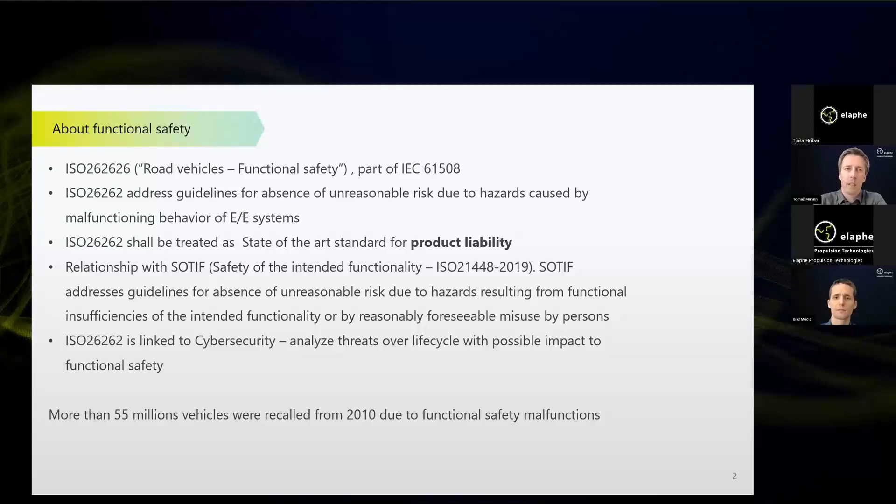An interesting fact is that more than 55 million vehicles were recalled in the last decade due to functional safety anomalies. And this is caused due to some issues in either the hardware, software, and or maybe on the system side of the products.

So the safety plan is one of the first and very important documents under functional safety. The safety plan specifies how we will address functional safety, and especially addresses the technical activities, organizational and process activities. Under the safety plan is specified the safety management during the lifetime for the complete team, meaning for the functional safety engineer, for the technical team, and even for the management. So we need to properly manage the competence of this key technical team. Of course, as for other projects, clear definition of roles and responsibilities is specified inside the safety plan.

And one thing which is very often termed in functional safety is the safety culture. Safety culture needs to be specified in the safety plan and needs to be disseminated inside of the team and with all the parties involved in the development, or actually in the complete life cycle. I will give you two examples of safety culture. First, the functional safety manager is independent inside of the organization. Second, safety has the highest priority and it cannot be compromised due to cost or schedule.

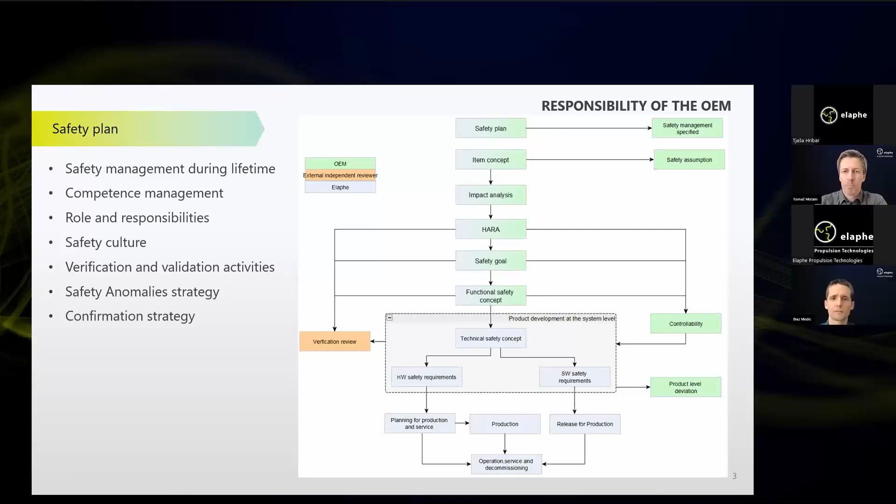Item is a system or combination of systems on which ISO 26262 is applied. So an item has some function on the vehicle level, and then item definition is actually a work product. It's a document which details and specifies what the item actually is.

Subcomponents of the item are elements, and these elements can be, again, a system, it can be the software, it can be the hardware, it can be even just the software model or software unit. So the item should have specified the function on the vehicle level, interfaces to other items or between components. It should specify what is inside the scope and outside the scope, so boundaries, dependencies from other components, known hazards, which are basically based on some previous experience, and safety assumptions.

So especially in the initial phase, maybe we are not sure about some requirements, then maybe we can treat this as an assumption, or write it down as an assumption. But then in a later stage during development, we need to validate these assumptions. So that's why it's very important that our assumptions are resolved during the development phase.

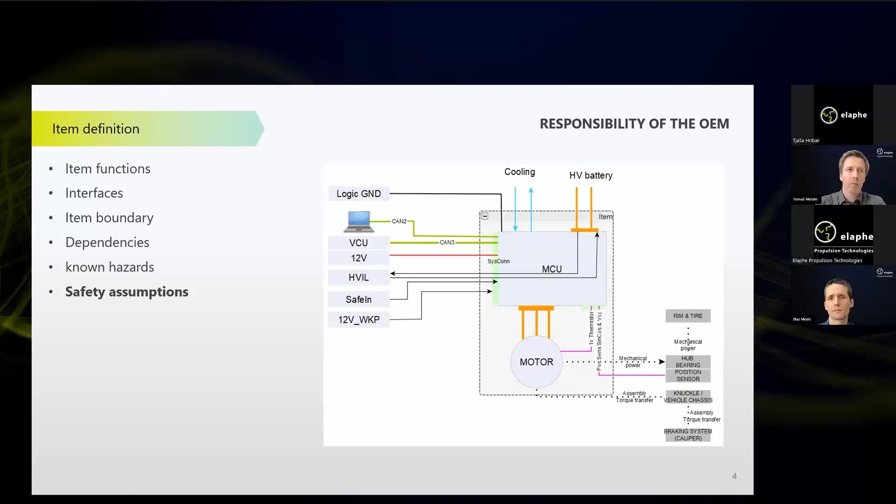HARA is an abbreviation for hazard and risk assessment. Under the HARA, we identify and categorize all the hazards of the item. In the first stage, we have to identify all relevant operational situations. For example, driving on a highway, driving on a country road with opposite traffic, standstill, charging, and so on. Each hazardous event is then classified with 3 parameters.

These are exposure, severity, and controllability. For a well-defined operational situation, it's quite easy to determine the severity and exposure, but this is not true for controllability by the driver. I will say a couple of words about this in the next slide.

If we have all these 3 classification parameters, then it's possible to determine the ASIL rating according to the metrics inside of the standard. And out of this ASIL rating and hazardous event, it's possible to determine the safety goal.

I will give you some examples for the powertrain systems and hazardous events. For the internal combustion engine, we can have unintended acceleration as the risk. For the system with one e-motor per axle, we can have, besides unintended acceleration, also unintended deceleration due to the regeneration braking performance of the motor. Then in case of a distributed drivetrain, which can be in-wheel or dual e-axle, we have either ASIL C or D rating, where D is the possibility to have some lateral movement, or so-called yaw rate.

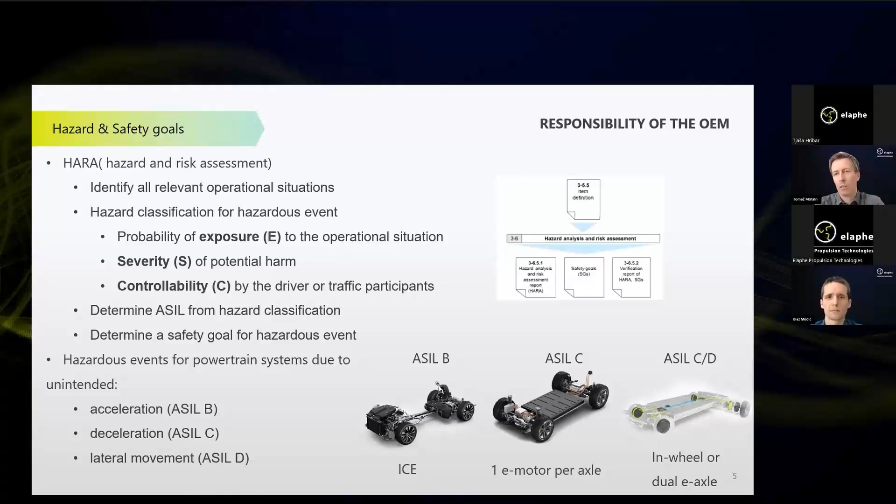So controllability assessment is especially important for the distributed drivetrain, to actually distinguish if we are in the range of the ASIL C or the D level.

In the initial phase, in the concept phase, we can use vehicle simulation to determine and have some first assessment of the controllability. Of course, for this kind of activity, we need as good a vehicle model as possible.

But then, when during development the item is integrated into the vehicle demonstrator, we can perform a similar activity on the actual demonstrator. For example, on the right picture, we inject a faulty torque on the rear left motor, in this case 600 Newton meters, and then we observe what the reaction of the vehicle and driver is.

On the bottom graph, we can see the actual value, which is the blue one, and the simulated one from the vehicle simulation. Out of this, we can get the controllability parameter, which gives us the ASIL rating. On the other side, controllability is very important to determine the fault tolerant time interval for each of the functions where this controllability is applicable.

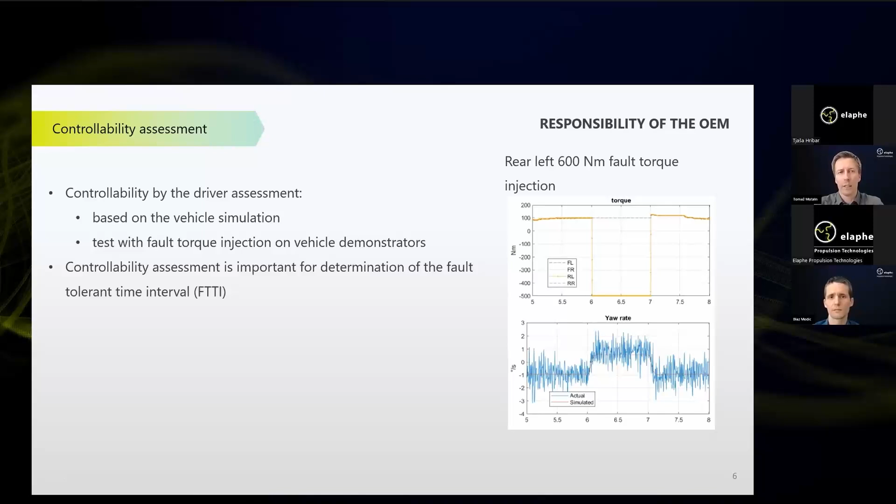Okay, hello also from my side. We are now finishing the concept phase with the functional safety concept, which is still the responsibility of the OEM.

In the functional safety concept, we will describe what we need to do to achieve the safety goals that we have previously defined. So the functional safety concept consists of different safety mechanisms and safety measures, which are described in terms of functional safety requirements and then assigned to different architectural elements of our item.

In practice, this can look, for example, like this: if we have an item which consists of two different CPUs, we can assign some functional safety requirements to CPU 1 and some functional safety requirements to CPU 2. So why is this important?

With a good design of the functional safety concept, we can achieve that we don't need to develop every part of our item according to the highest ASIL rating of our safety goals. This is important because it can save us a lot of development time, cost, and resources further down the road during the product development stage.

Once we have our functional safety concept defined, we still need to treat it as preliminary until we have validated it in the end, during the safety validation process.

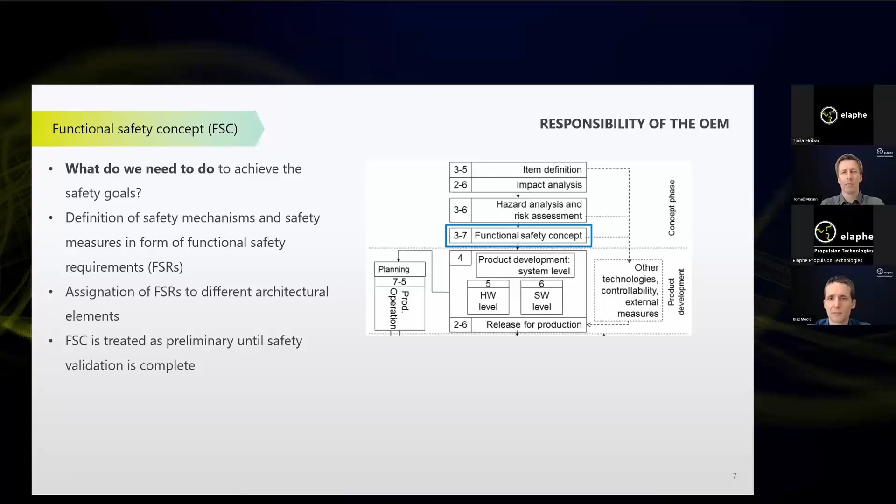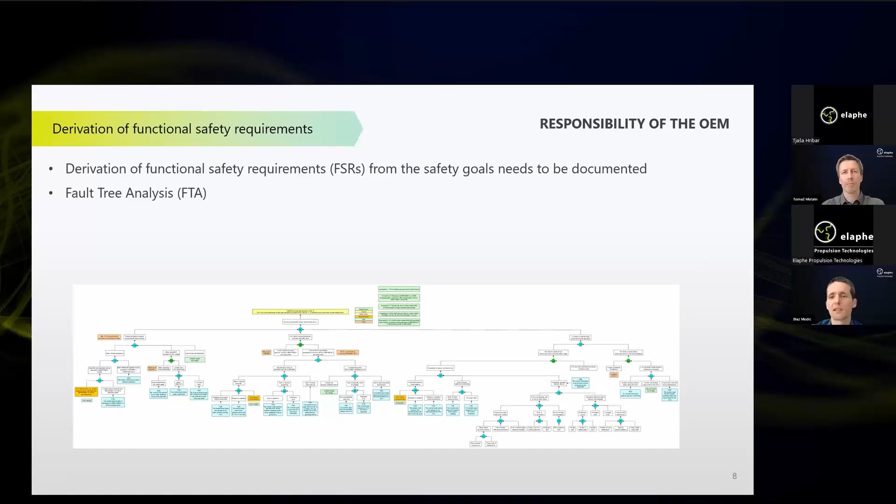So let's take a look at this process in a bit more detail. This will be the fault tree analysis that we will be looking at. Unfortunately, I cannot share the complete analysis, but we will explore just one path from the top, from the safety goal, down towards one of the functional safety requirements.

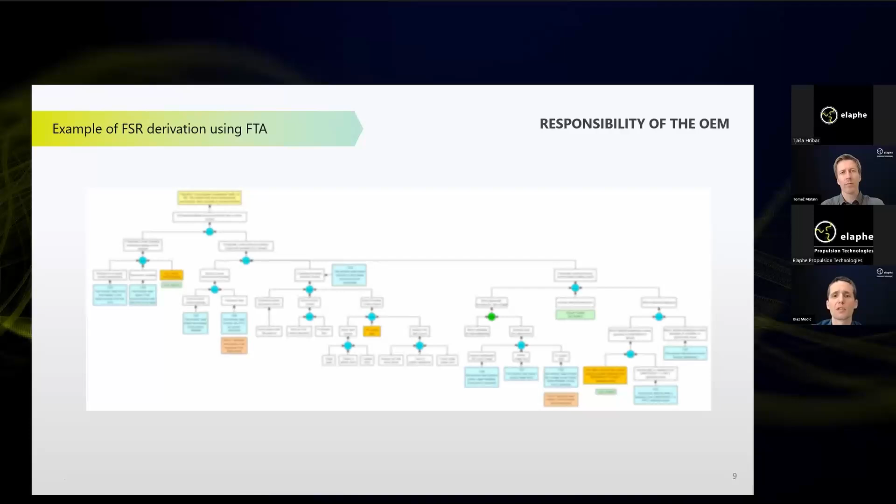So, like mentioned, we start at the top with the safety goal, which in this example states that the vehicle shall avoid unintended deceleration whilst traveling in forward direction. This safety goal is dealing with the hazard of unintended deceleration and has a certain ASIL rating.

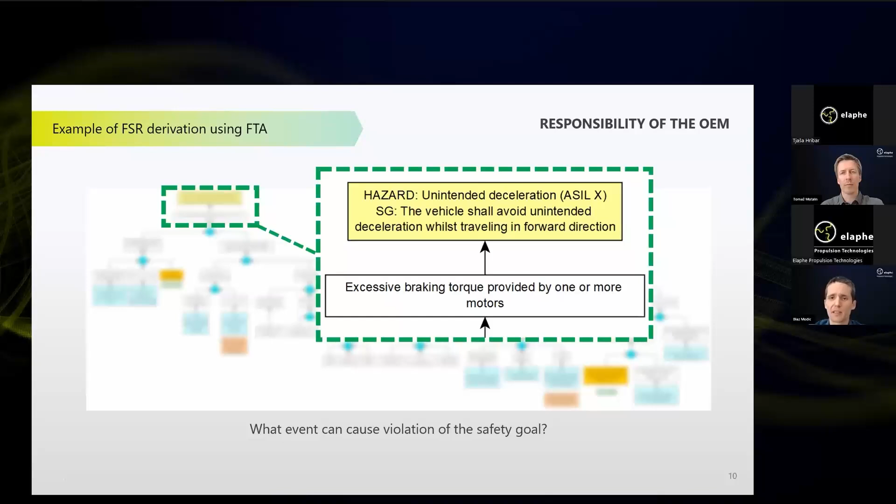So to begin this analysis, we need to ask ourselves what event can cause the violation of this safety goal. In our case, this safety goal can be violated in case excessive braking torque provided by one or more motors happens. So we have our event, but this event is still too general for us to define a safety mechanism that can prevent it, which means we need to derive it further.

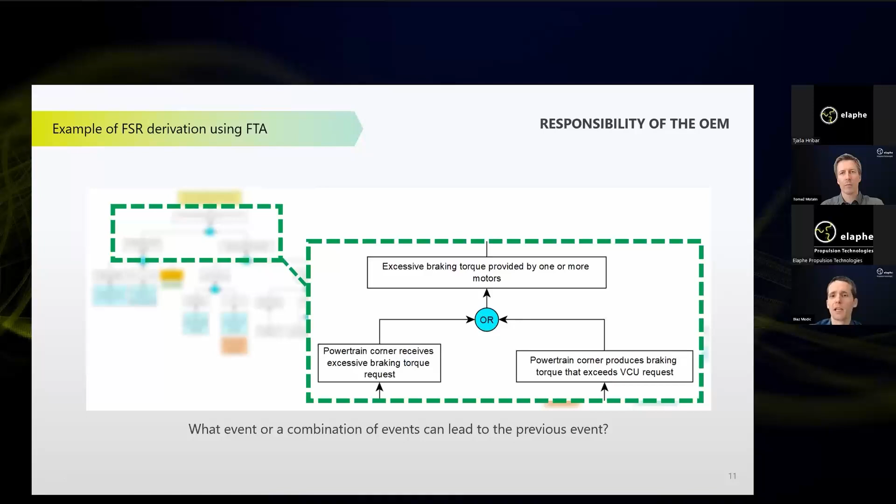We then ask ourselves what event or combination of events can lead to the previous event. Excessive motor braking torque provided by one or more motors can be the result of the powertrain corner producing braking torque that exceeds the request, or that the powertrain receives the excessive braking torque request. And if we derive this further, we follow the left path.

Powertrain corner receiving excessive braking torque request can be the result of either the VCU actually sending the wrong request, the request being outdated, meaning it was requested a while ago but is no longer relevant, or the request getting corrupted during transmission.

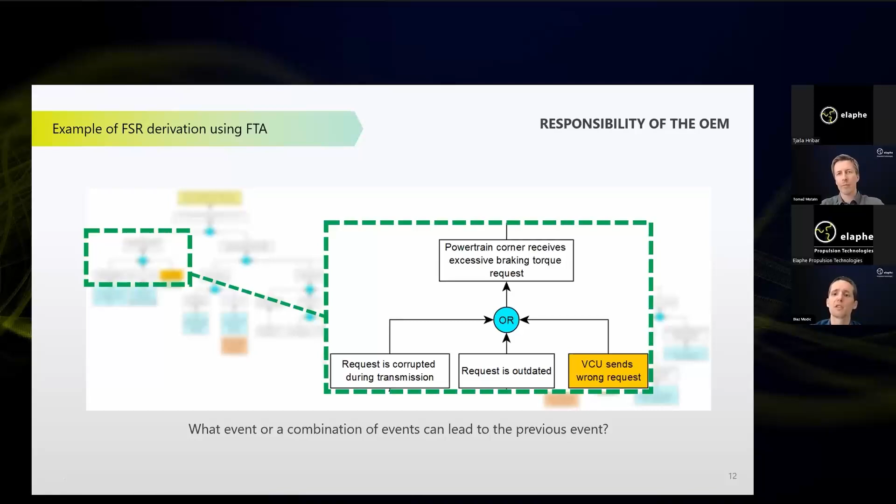So now these events are all simple enough for us to define functional safety mechanisms for them. For example, for the message corruption event, we can define a functional safety requirement which states that the inverter shall check the integrity of the data received from the VCU.

So in this example, we followed one path from the top, from the safety goal down to one of the functional safety requirements. Then, to finish the complete functional safety concept, we need to define these functional safety requirements for each of the events that can cause the violation of this safety goal.

Then we repeat this process for all of the safety goals, and then we get a list of all of the functional safety requirements that we need to implement in our system. In the end, what is left to finish the functional safety concept is just to assign those functional safety requirements to the different architectural elements of the system.

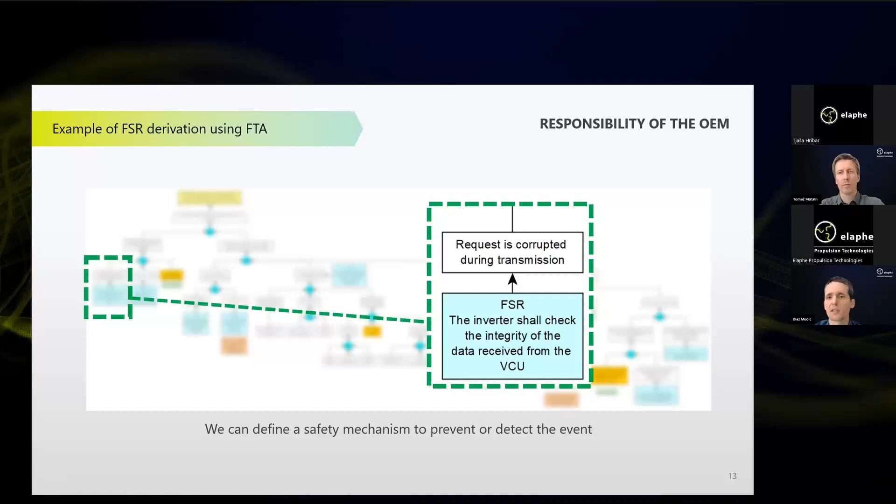So with the concept phase of the design finished, we now begin the product development phase, which is now the responsibility of Elaphe as the supplier of the powertrain. In the technical safety concept, we describe how we will implement the functional safety concept.

Again, the functional safety concept describes what we need to do, and the technical safety concept describes how we will do this. This is described in terms of technical safety requirements, which again need to be derived from the functional safety requirements, using appropriate analysis and documenting the process, so that we are able to show a potential reviewer or assessor how these requirements were defined.

When we get to the list of the technical safety requirements that we need to implement, we then allocate them to software or to hardware, or in some cases to both, depending on how we will implement those requirements.

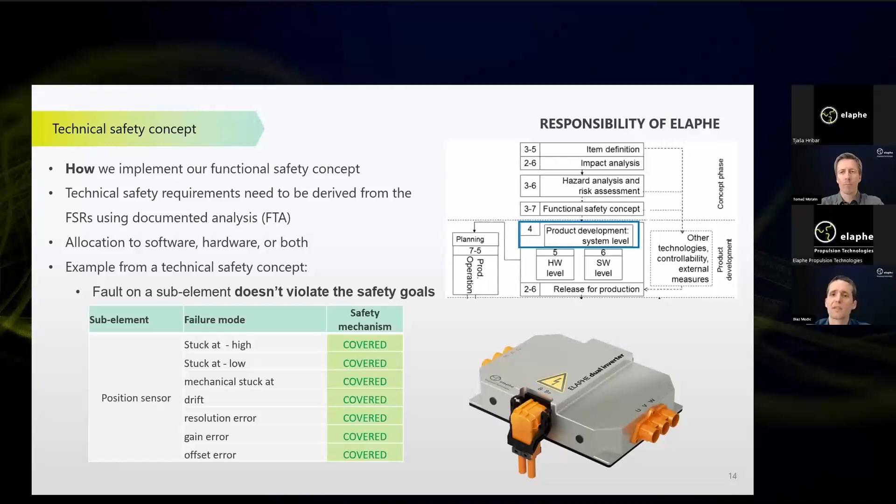So all of the technical safety requirements that are allocated to software then need to be implemented by the software team. The software team first needs to start with the specification of the software requirements. Then they need to specify the architectural design and define the software units that need to be implemented. Only then can the actual software implementation begin.

And this can be done either by coding or using model-based design. The standard does not limit you there. However, it does prescribe different development methods, principles, or processes that you need to follow during your software development, depending on the ASIL rating you're developing for.

In the standard, this is presented in the form of tables like you see on the bottom left, where different principles are listed. And then on the right, it is described how mandatory it is to use them depending on which ASIL rating you are developing.

One thing you need to take care of when developing software for safety critical applications is following the freedom from interference principle. So what does this mean in practice? Usually in your software, you will have parts that deal with functional safety, for example a safety mechanism to detect faults on the position sensor I mentioned before.

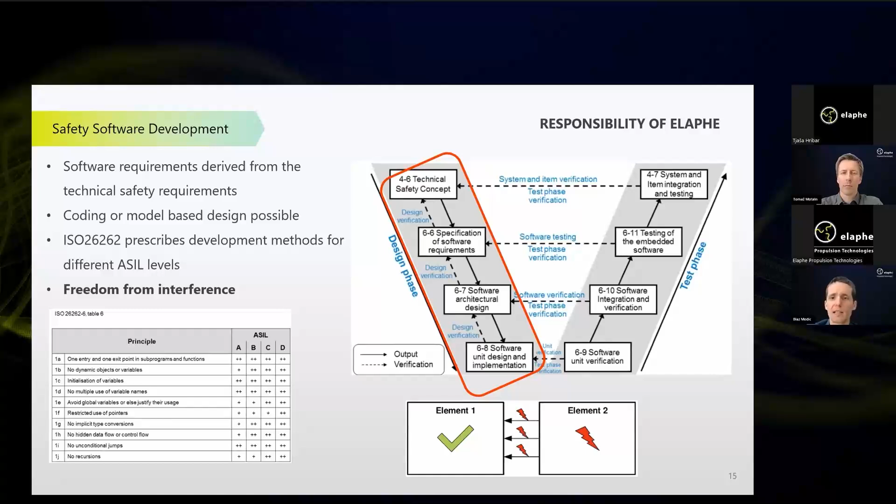This is implemented by running the safety and non-safety software on different CPU partitions or even on different CPU cores, making sure that they are using separate memories and that the access to those memories is protected.

So when you finish the design phase and your system is implemented, you need to test every part of the design phase during the testing phase. You begin by testing the software using industry standard practices like unit testing, code reviews, static analysis, dynamic analysis.

And when you get to the testing of the technical safety concept, since that concept is defined at the system level, you also need to test it at the system level.

We at Elaphe are using a hardware in the loop platform to do this. This enables us to define a test for each of the technical safety requirements that we have, and then run those tests automatically, for example at every software release. This enables us to perform regression testing, where we make sure that with the new release, the functionalities we have already implemented and tested in the previous release still have the original functionality.

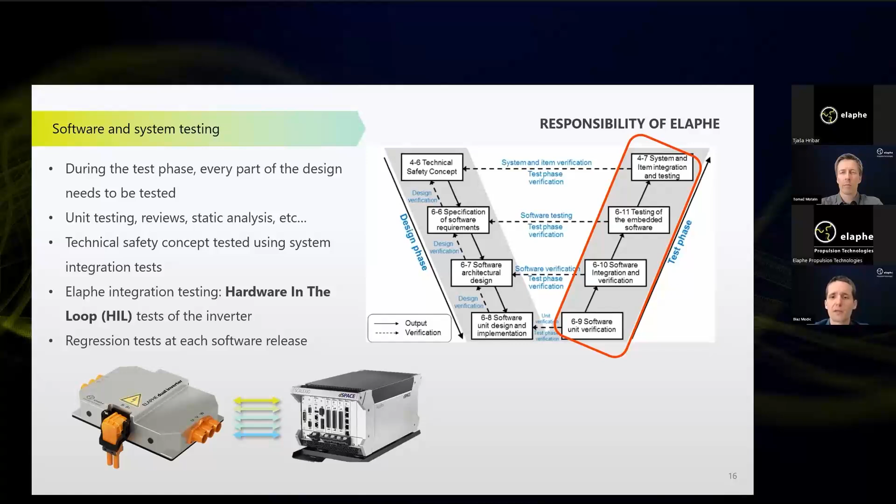Here we have presented the workflow that needs to be done to get from the specification of a technical safety requirement all the way to the verification of that requirement.

So we begin by the system engineer deriving the technical safety requirement from the functional safety requirement and entering it into the requirements database. This requirement then needs to be sent for a review to an independent reviewing team, which can consist of different system engineers, software engineers, hardware engineers, or functional safety engineers.

And they need to make sure that the requirement is written in a way that will actually describe how the safety mechanism will be implemented.

So once the requirement is approved, it is then forwarded to the hardware or software development team who can start with the implementation. At the same time, the system engineer also needs to write the test specification for this requirement, where he describes how this requirement will be tested.

This is then again entered into the database and sent for a review to make sure that the specification actually describes how the requirement will be tested.

Once the specification is approved, it is forwarded to the testing team, which can begin with the implementation of the test case for the hardware in the loop platform.

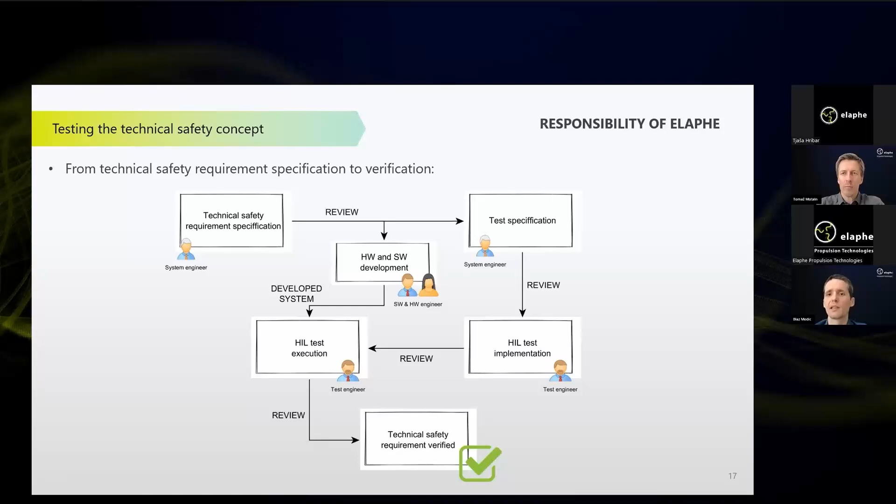So as you can see, there are a lot of steps that need to be taken, but the important thing here is that every step is well documented so that in the end we have the traceability to show how we got from the specification to the implementation and then through testing to the verification of our requirement.

Then the final step of the testing phase is the safety validation on the vehicle level, which is the responsibility of the OEM. Firstly, the OEM needs to provide the evidence that the safety goals are correct and achieved at the vehicle level. They need to demonstrate that the correct safety goals were defined.

Then they need to demonstrate that when the item is integrated into the vehicle, it is still compliant with the safety goals, and that the functional and technical safety concepts are appropriate.

So even though this is the responsibility of the OEM, Elaphe can still support here with, for example, helping with the test procedure definition, planning or even execution of the test, and then in the end with the analysis of the test results.

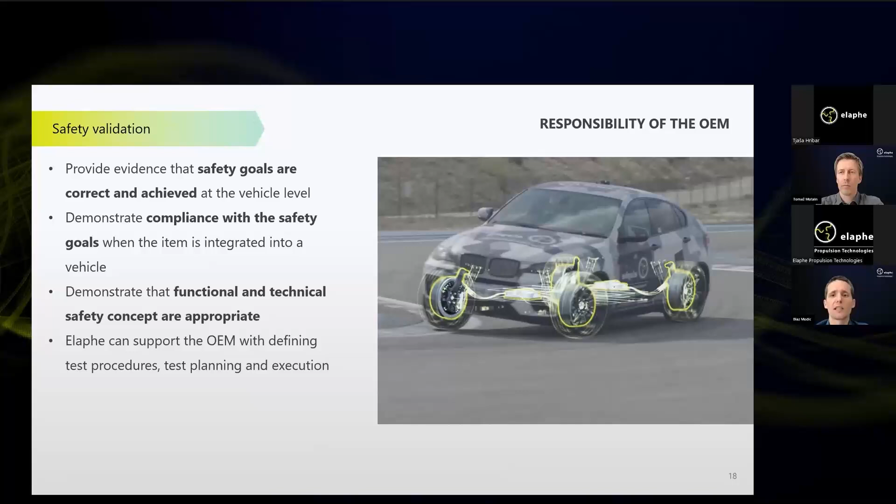So functional safety has a lot of work products, and the safety case is a summary for each of the work products. Under the work products are defined, for example, software architecture, software requirements, or very detailed specifications about the product. Due to this, Elaphe provides a safety manual, which is a summary of the safety case in order to protect our know-how on some key elements of the motor control and safety algorithms.

Inside the powertrain safety manual, we describe the safety validation outcome, which is validation on the vehicle level. It describes the verification outcomes from field testing, software testing, and unit testing. It specifies the status of all the safety assumptions from the initial phase, to check that we have full coverage and evidence of compliance with these safety assumptions. During development, there are always some limitations or hazards. All this is described inside this document, which is released at the end of the product development cycle.

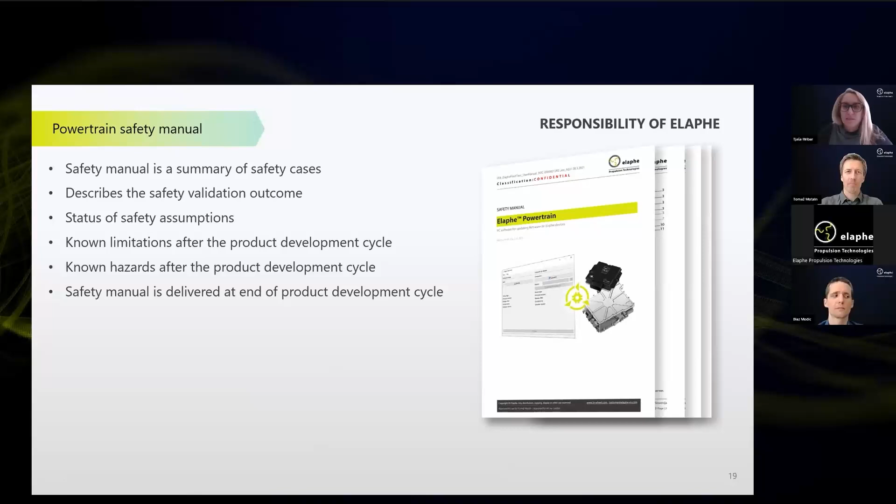Tomaž and Blaž, thank you for sharing your knowledge on functional safety. Let's start with Q&A. The first question is: is it mandatory to follow functional safety principles even if the vehicle system is very simple and the production series is small?

Yes, it is mandatory. Functional safety doesn't specify or distinguish between the production size of vehicles, and it is applicable even for prototype vehicles if they are used on public roads. On the other side, if you have a very simple item or vehicle, you will be able to perform the HARA and item definition much faster. Maybe you'll figure out that you don't need any functional safety levels and all components can be rated as QM, but most probably you will identify some risk and need to apply some functional safety functions on your item.

Elaphe, as we already mentioned, can support in the concept phase as well as during product development. We've developed a high safety culture, and we can provide distributed drivetrain components to the customer which identify the risk and have the proper risk mitigation strategy.